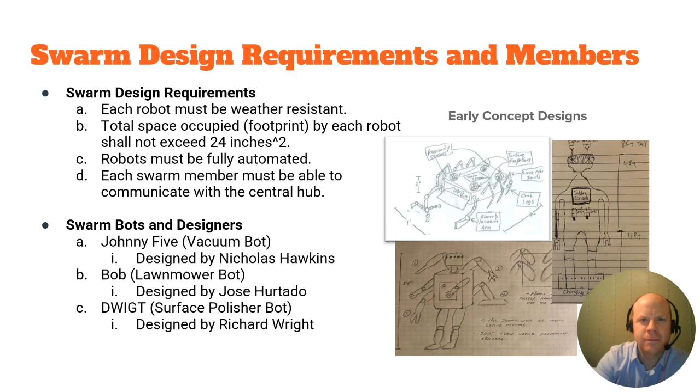Here we have Johnny 5, our indoor vacuum bot, designed by myself, Nicholas Hawkins. There have been quite a few design changes from the original concept design, mainly because some of the technologies needed for the concept aren't currently available. So several items were scaled down and simplified quite a bit, but I believe the final product here is better than the original concept and will also be cheaper to produce.

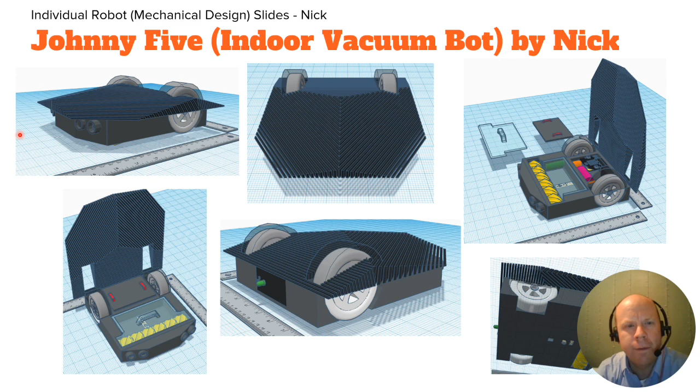We've got several views here: this is the front of Johnny 5, the top view which shows some of the internal components that we'll go into more detail on in the next slide, a bottom side view, and the back status lights, which we'll also talk about in the next slide. And here you've got kind of a hood-pop view with both covers in place.

For our internal components, we have a 9-volt power source here, the Arduino controller, 2 proximity sensors up front, 2 independent drive motors that drive these wheels here, and we've got a brush motor, represented by this green right here, that drives this brush.

This yellow part is our brush head. The purple cylinder here represents our vacuum motor. This right here is the debris full sensor, which lets the bot know when the debris bin is getting full. And showing here on the back of the robot, we've got our status light and also our on-off switch that can be controlled by the central hub.

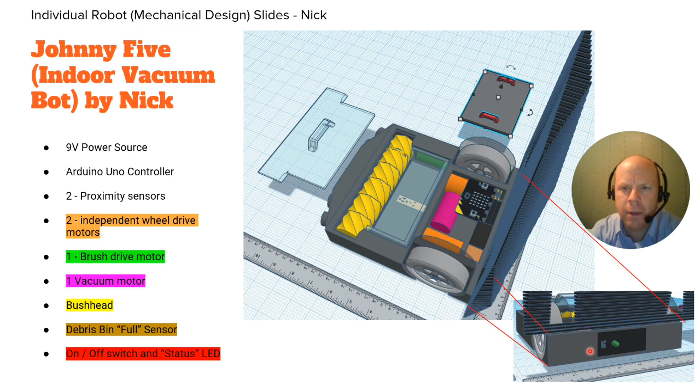For our circuit design overview for Johnny 5, we didn't have a lot of changes from the original conceptual design. The biggest change was, instead of crab legs, we went with these drive motors that actually turn wheels. That was much more practical for what we were trying to do with this vacuum bot, and that was the justification for these changes.

Here you've got your control board and the on-off switch here that the central hub can communicate with, letting the robot know to start or to stop. Our brush motor, which is up here, and then our vacuum motor down here. We've got our 2 proximity sensors out in front.

And we have a status light, which is right here. It's actually an RGB LED. It can switch between red, green, and blue - green being good, red being stop, and blue meaning that the debris bin is full.

And that's what this sensor is right here - this is a flex sensor. It sits directly underneath the debris bin. As the bin fills up and that sensor flexes, it lets the bot know that the debris bin is full and that it needs to be emptied.

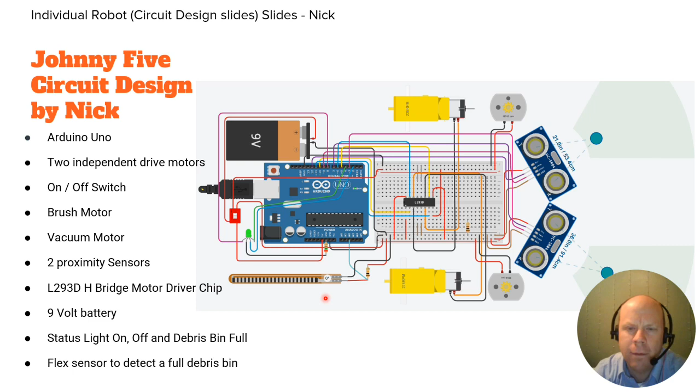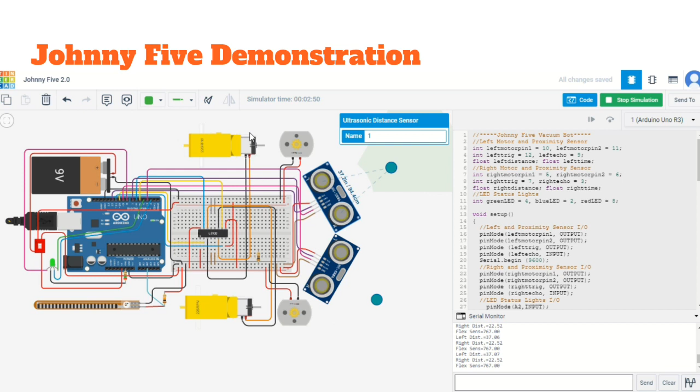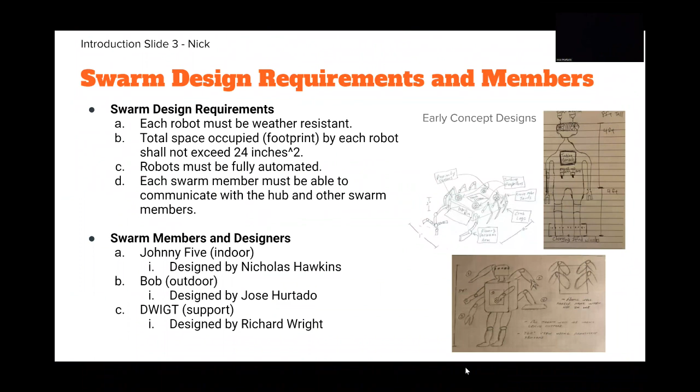This is the lawnmower robot Bob, essentially Bob's design, a very simplistic lawn mowing robot that'll help consumers cut grass for them. Prior to this, we can look at previous drawings showing the complexity of our robot. We had to simplify it on a greater scale because of the abilities of Tinkercad. So right here, in this bottom corner, was the robot Bob.

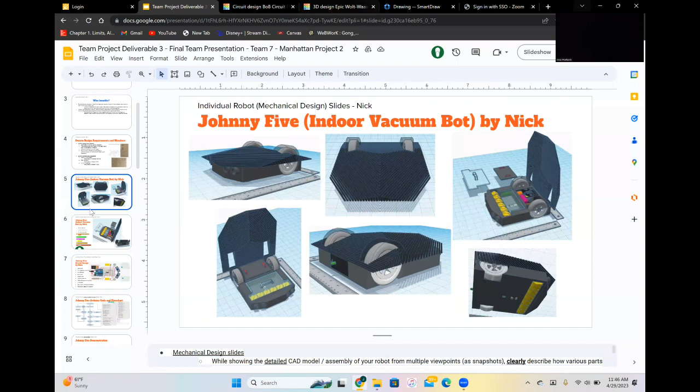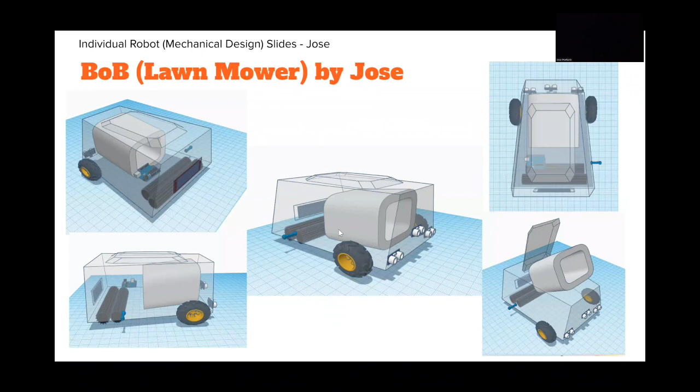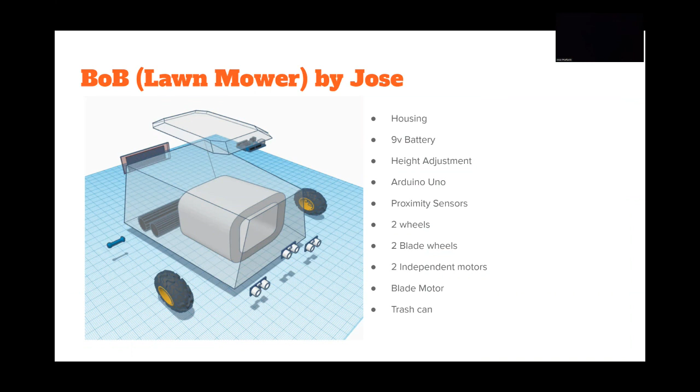If we scroll down, we'll look at the updated version of this robot, which is now just a simple robot. The components will have a housing, a 9-volt battery, a height adjustment for the lawnmower blades, an Arduino Uno, proximity sensors, 2 wheels, 2 blade wheels, 2 independent motors, blade motors, and a trash can. So in running this circuit, this is how the setup will be.

We'll have the Arduino, 3 proximity sensors, 9-volt batteries, blade motors, 2 motors, and a micro servo, and it'll all be computed with the L293D H-bridge motor driver chip.

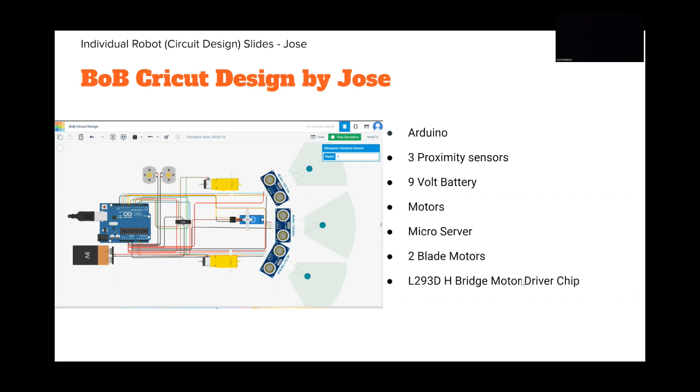So as it begins to drive, it will ask the question: are the sensors being disrupted? If not, it'll continue moving forward until a sensor is disrupted. Once the sensor is disrupted, it'll go through 3 steps asking where it should go rather than just moving forward.

If it goes up and the center sensor is being disrupted, then both motors will kick into reverse, reversing away from that disruption, and then go back into the previous loop of asking whether or not the sensor is disrupted and moving forward. Then it'll go into the next check.

If the left sensor is being disrupted, the right motor will turn in reverse and the left motor will turn forward in order to turn the robot to the right. Once it's out of the disruption, it'll continue moving forward until there's another disruption.

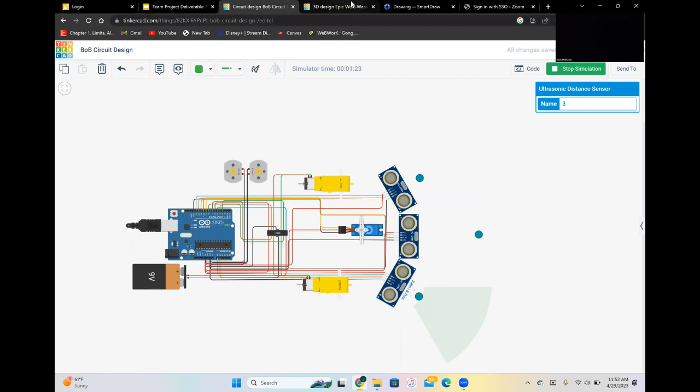And this is the breakdown, all the components of the model, and that is the presentation for Bob, the lawn mowing robot.

There will also be two of these sensors located here in this top piece, as well as 2 batteries to run both Arduino boards required. We have 1 motor here that will run these polishing pads around the edge. These 2 DC motors will also be responsible for running the wheels back and forth, left and right, making sure Dwight doesn't decide to take a quick tumble off an edge.

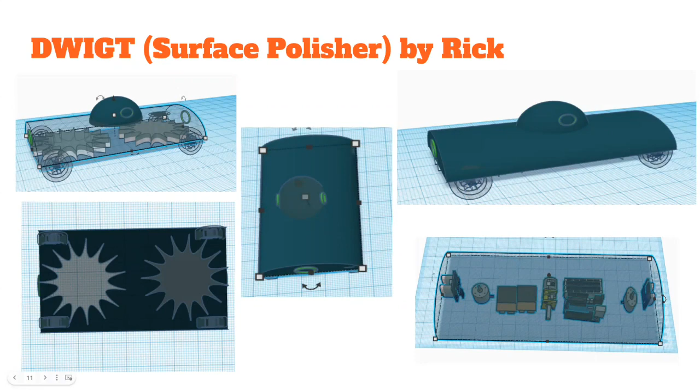Dwight's circuitry is a little different than the other bots, as it requires multiple Arduino boards to compensate for both front and rear sensors checking distance, as well as the motor it has to run to keep the polisher going. Below Dwight, there are 2 round brushes that continuously polish the surface it's on. This is run by 2 Arduino boards, which check the distance in front and behind it, as well as to each side of it, ensuring Dwight has plenty of room to operate.

If those sensors show that Dwight is within range of falling or reaching the distance of an edge, Dwight will stop and reverse. Or if it's finished the end of its cycle, it can be turned off from the central hub as well.

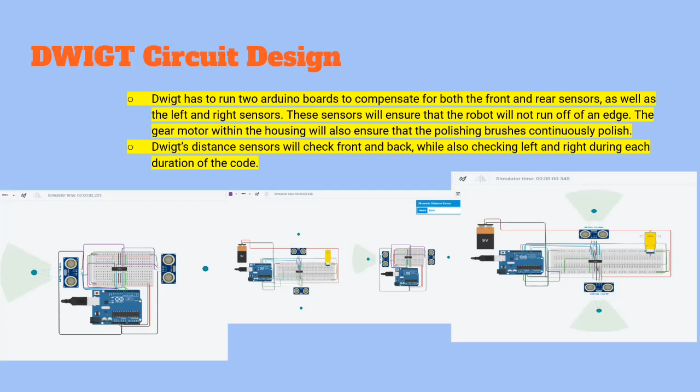As you can see from Dwight's flowchart, it's very straightforward. Consistently, it's polishing after it receives the on command from the central hub. It'll keep checking distance on all sides as it proceeds. As it successfully proceeds, it will either continue to turn left to right, depending on where it detects the edges.

Or it will continue to clean until it detects edges. Whether it's going forward or can't go forward, it's going to reverse, and it's going to restart the whole process, checking distance each time.

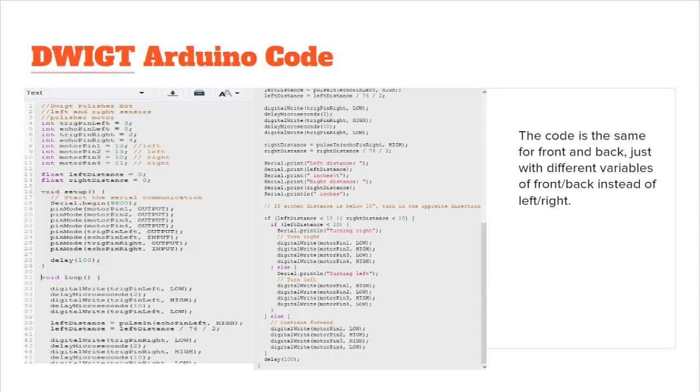All right, as you guys can see from this demonstration here, see the distance here for this sensor. Left side is showing we're too close, so turn off the motor. Motor's not running on this side.

Motor is still running on this side here on the bottom because the distance is over the 10 inches required. This motor here is still running to keep the polisher pads going. Everything is acting as it should, making sure that Dwight can take care of it.

He'll keep polishing your floors, your areas, all that you need. Showing this distance here being underneath that 10 inches will show it shuts off the motor so that way Dwight won't run off the edge for you.

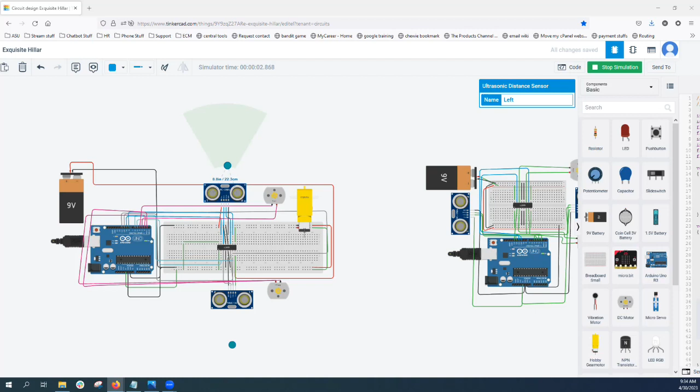The lawnmower bot runs based off of a timer. Once that timer hits 0, that's recorded in Central Hub, which will send a command to the lawnmower bot to begin, and it'll keep running this loop until that sequence is complete. Once it's complete, the lawnmower bot will get a command to return, and that mowing timer will be reset to 0. The vacuum bot is very similar.

The only small change is there's a question here: is the vacuum bot debris bin full? If it is full, we're going to post the vacuum bot notification on the bot status light. That's the little blue light on the vacuum bot that lets the operator know that the debris bin needs to be emptied. And once the vacuum sequence is complete, we'll restart that timer and then activate the polisher bot.

And then the polisher bot will run its sequence. And once that's complete, it'll go back to here and we'll start all over until the vacuum timer reaches 0.

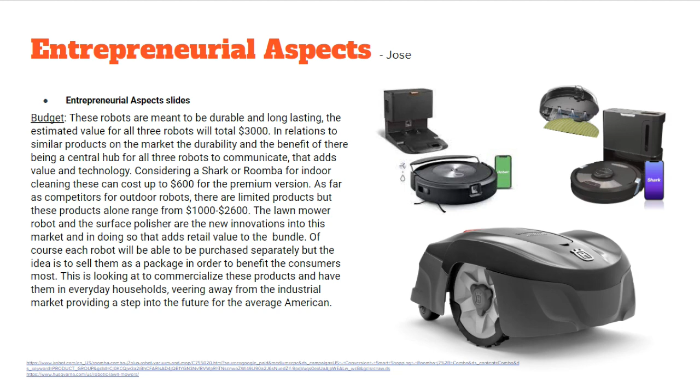So as these presentations have shown, these little bots are going to make a major impact on the amount of work that everyone has to perform inside and outside a household or a business. They're simple to run and use, and they're intuitive to handle problems that you'll run into in the household on their own. And the bots are going to revolutionize this cleaning industry. They're going to increase that quality of life for the customers that get to take advantage of them.

In regards to the lessons learned from this project, we definitely dove in with both feet. We didn't worry about people not understanding what we were doing. And we really embraced the entrepreneurial mindset, building something fearlessly, creating a product that was going to make an impact on the customer in a positive way, instead of just another dust collector to lessen the weight of their wallet.

Our team did have a couple different issues throughout the time. We lost our team leader minutes before one of the assignments was due. That was definitely a struggle, but we still were able to accomplish great things. We still were able to reenact our design process, letting our communication be key throughout.

And our team really did work hard to talk through asynchronous methods, primarily Discord and Google. There were setbacks, of course, like I said, losing a team member was hard. We had about a food poisoning incident that threw off one of our members, which was funny that it hit at that point too.

This project being as large as it was, if we had to do it again, now knowing the full scope, we definitely would have spent more time digging into everyone's strengths and opportunities, as well as making sure communication was key in the case of losing a team member, making sure people were communicating, hey, we're going to be out of this group, out of this team.